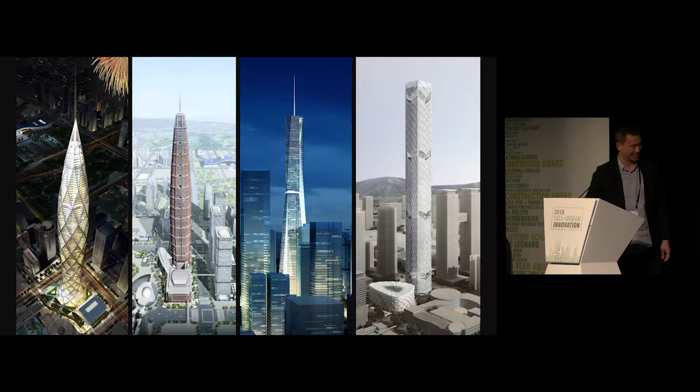Thank you, Felix. Gene had intended to be here until yesterday. Something came up and he asked me to fill in for him. He regrets not being here, would love to see all of you. And this is a project that he actually had quite a bit of involvement in, feels very passionately about it, and is really disappointed not to be here.

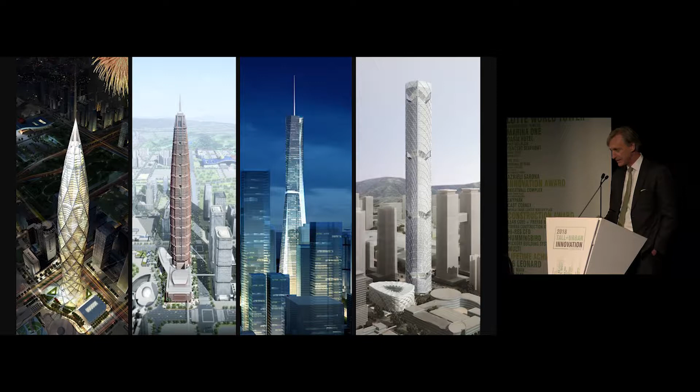The stability, permanence, and unity were the 3 concepts that the chairman of Ping An imparted to us at the end of the competition. And he felt that the Empire State Building in New York was the perfect embodiment of those principles, that we should look to that building and really understand it and bring its thinking into the design

of their headquarters building. I think also, as the center of Midtown Manhattan, an icon that represents the city to the world, he had the same hopes and aspirations that the building we designed for him would take on the same characteristics in Shenzhen. And I don't know that he was aware of it, but he was maybe prescient in other ways.

Gene is fascinated by the statistics of growth in New York. When the Empire State Building was initiated in 1930, it came on the heels of 30 years of dramatic growth, over 1 billion square feet of space built in Manhattan alone, not New York City, but Manhattan.

And the circumstances in Shenzhen are not that dissimilar from the mid-70s, when we think of Shenzhen being transformed from a village to the current urban metropolis. 2.5 times as much area has been built in that 30 years, but that 30 years sort of signals the starting point for Ping An Insurance.

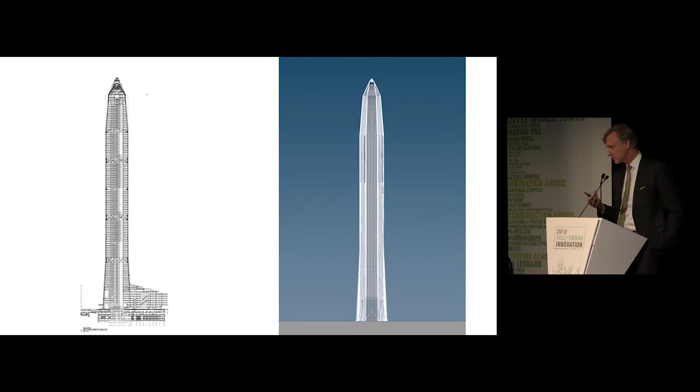So the building, I think, is quite striking. It really diverges from the other super high-rise buildings that you've seen KPF having designed, whether it was the Shanghai World Financial Center that Bill presented yesterday or the project that Jamie just presented, which are buildings that are much more sculptural, where they are all highly efficient in structural terms. But Ping An is really the first building that takes the structural response as informative in the development of its design.

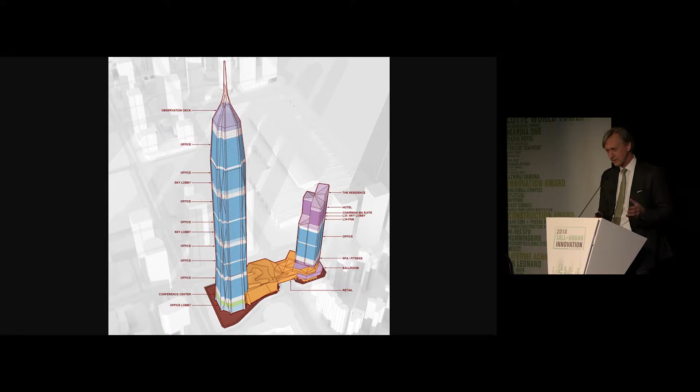But the podium that bridges them together then becomes part of the public space that informs this part of the city, which is very dense. Sectionally, the cooling towers for the building have been pulled into the tower itself so that podium rooftop is activated by restaurants and public spaces.

So here you see the building on the skyline. Those exposed columns generate a frontality to the building. It's almost like the grid of the city is pulled up into the skyline, and again representing stability, permanence, and unity as the chairman's directive. So it's hard really to understand this building without really understanding its structure and the attempts of its optimization.

One of the points of deviation is we try to think about how you take the idea of creating a new Empire State Building but doing it in a modern idiom, and it was also informed by the idea that maybe the structural expression could be something that brings us into the new century and into a more forward-looking position. So the tower, as finally generated, is really quite efficient structurally.

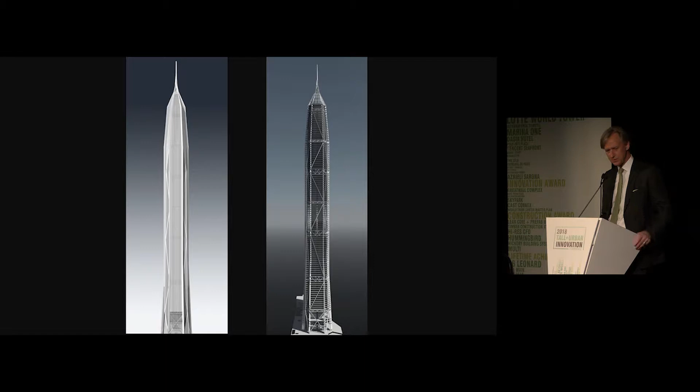We worked with Dennis at Thornton Tomasetti on the scheme, but all of those moves are evident on the elevations, the sculpting of the corners to minimize vortex shedding and to help the building's performance, so that this scheme in its final version reduces wind forces by somewhere between 30 and 40%. So it's a mega column scheme. The difference from our others is that the columns are pulled to the outside. That broadens the stance. It roughens the surface.

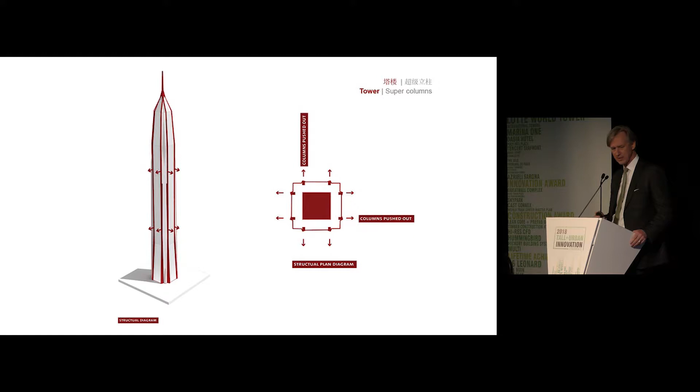The corners are treated differentially over the height of the building, again to aid in the building's overall performance. Here you see at the corners the transformation of the expression of those, a diagonal expression which helps minimize some of the shear forces between the belt trusses that exist at the refuge floors. And then on a typical floor plate, taking those columns, which are roughly 15 square meters apiece, and pulling them out allows the office space inside to be more uniform.

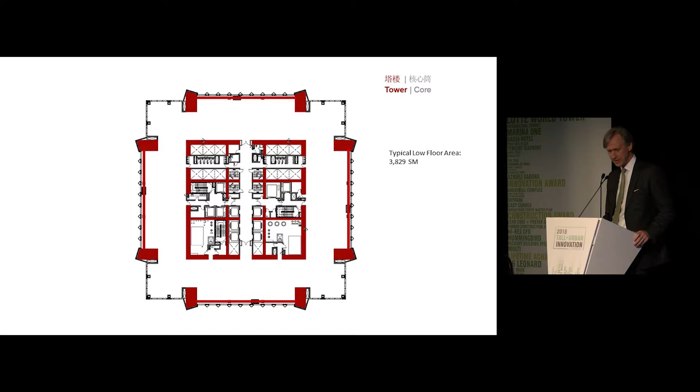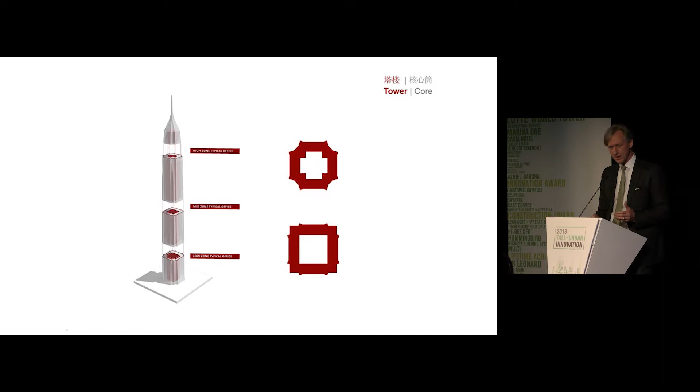So at the base of the building, we have roughly 14-meter lease spans from a very dense core, and with the opening of the corners on the typical floors, those trusses connected again at the belt course levels. The expression of those corners changes over the height of the building. So the base has got those re-entrants. As we move to the top, we change to a concave surface, and that is partly informed by the transformation of the core dropping out of the corners.

And so we get something that, even with the tapering, the building still has impressive lease spans and opens up the tower to the view. The surfaces of the tower that you see, the chevrons that are expressed on the curtain wall, are also contributing to the roughening of the building surface to increase its efficiency.

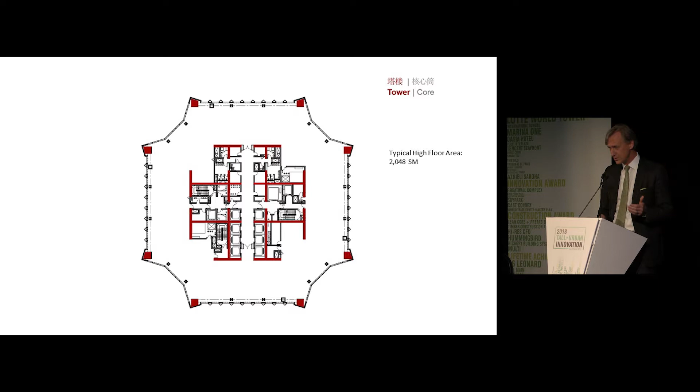So as we think about sustainability, one of the key tenets, in addition to minimizing energy usage, is to minimize material. So we've gone to great lengths towards that. And then at the base of the building, the columns pull apart and express entry into the lobby, and it's to help expand the sense of the site as the building meets the ground.

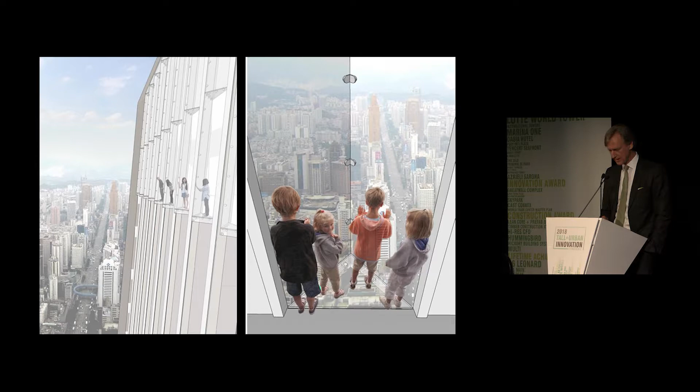The tower top is given over to an observation deck, giving something back to the city. It utilizes a series of glass prisms that cantilever over the building exterior in an interactive way for the public to experience the building.

The glass floor—you'll notice the foot isn't on it, it's just set back. And then the 117th and 118th floors are occupied by a restaurant in that pinnacle.

The very top of the tower, the moment is resolved in a pyramidal form, a jewel that resolves the 8 expressions on the building exterior. But it really might be thought of as a seed pod.

The tower in its current form is 599 meters. The additional 60 meters that the spire was going to represent were removed due to influence of the aviation authority, but we're optimistic that something will change in the future and the spire will return.

The curtain wall of the building, the expression of the structure on the outside—I think the chairman initially thought those should be clad in stone to reinforce the idea of permanence. But the exterior in its final version is clad in a linen-finished stainless steel, so the building really glistens in the sunlight.

The 8 corner columns are reinforced by the chamfering of the wall that infills between them. The building, as it folds into itself at the top, reflects light and provides a sense of unifying the 4 facades as they rise to the top.

The fins on the building incorporating window washing and lighting through perforation at the nose are all part of this complete stainless expression on the outside—much more visionary, we thought, an expression of the building for the future than something that's purely masonry, like the Empire State.

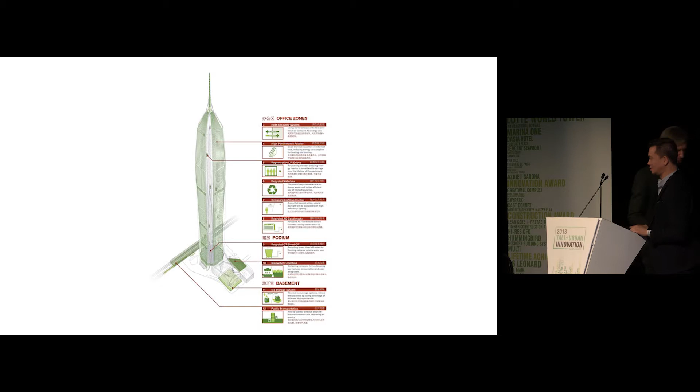Thank you, Rob. As a responsible developer, for this building we also did a lot of sustainable design for the energy use, the recycled water, and the recycled stainless steel curtain wall system.

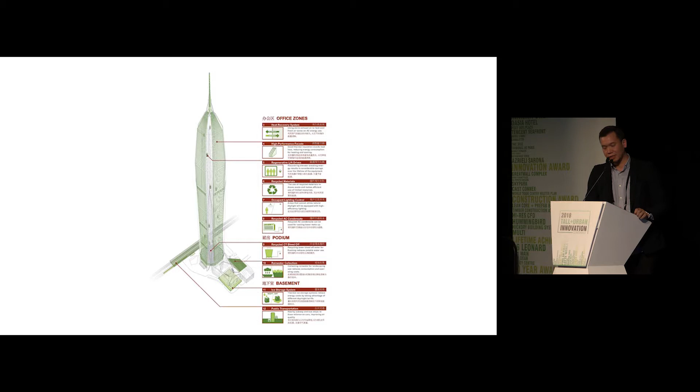After applying all these energy-saving designs, from the calculations we would like to achieve 42% in energy saving compared to actual standards.

We also did calculations on the energy consumed and found that for our building, the energy consumed the most would be the air conditioning system, then the lift, and then the artificial lighting.

I'd like to mention two interesting points. The first is our building is the first building in China to apply shade and LED lighting synchronization. That means the intensity of the internal lighting and the height of the window shade are designed based on sensors outside the building and below the ceiling, using data collected from solar intensity and solar angle. After 1 year of moving in, we found we save 25% of energy on artificial lighting.

The second thing is the ice storage cooling system, where we make ice as the coolant for the air conditioning system, trying not to waste the electricity generated during the night. We create ice during the night, and the ice melts during the day for cooling. For this, we found we save around 20% of the annual electricity bill for the air conditioning system.